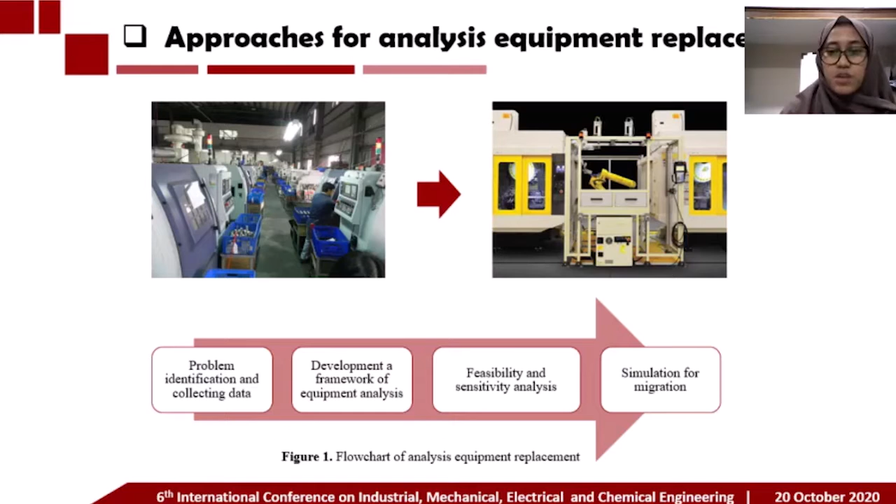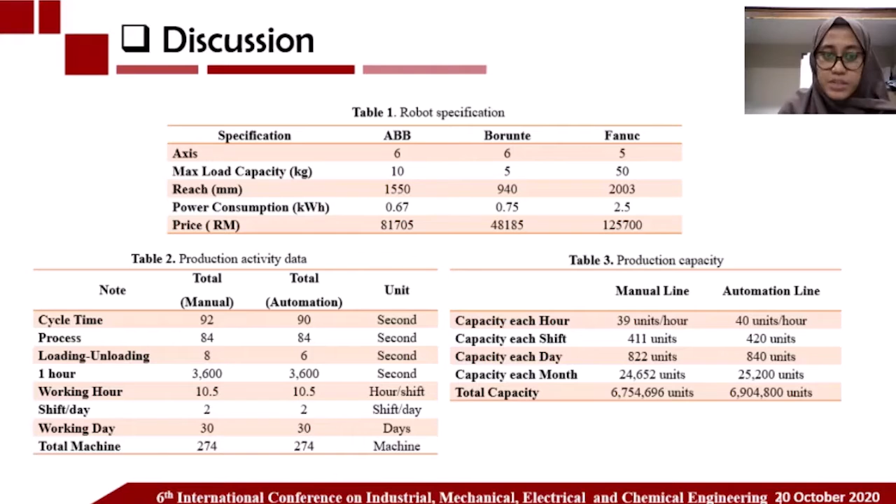This is the data used to evaluate the investment analysis, such as robot specification, production activity data, and production capacity. The first step is total cost ownership.

In this section we explain the total cost ownership of each alternative robot using the data collected. In this calculation, one robot used for palletizing activity shows that the total robot use is 68 robots, and we assume 15 years of lifetime to calculate the total cost of ownership.

Total cost ownership contains data including expected life cycle, interest rate adjusted to the actual interest rate in Malaysia, investment cost for the robots, average energy consumption each year, average maintenance cost each year, and average engineer cost each year for 15 years.

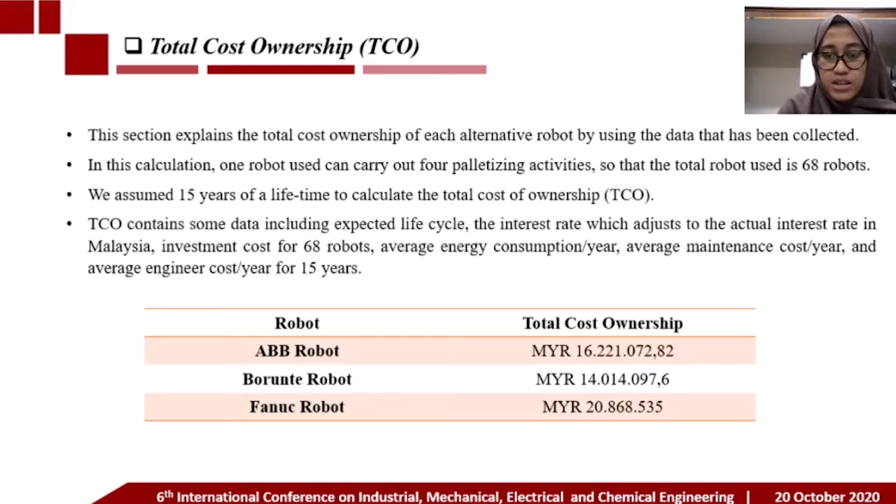This table shows the result of the calculation of the total cost of ownership.

There are five scenarios, namely income rise 25%, income rise 15%, average income, income falls 15%, and income falls 25%.

From the five scenarios and the four analysis methods, it was found that three robots are worth investing in. However, the payback period method shows that if there is a 15% decrease in income, the payback period is more than 5 years for the three robots.

At the same time, the company only allocates a 5-year payback period. Therefore, the Borunte robot is the best choice for investment because when there is a 15% decline in income, the payback period for the Borunte robot is still between 5 and 6 years.

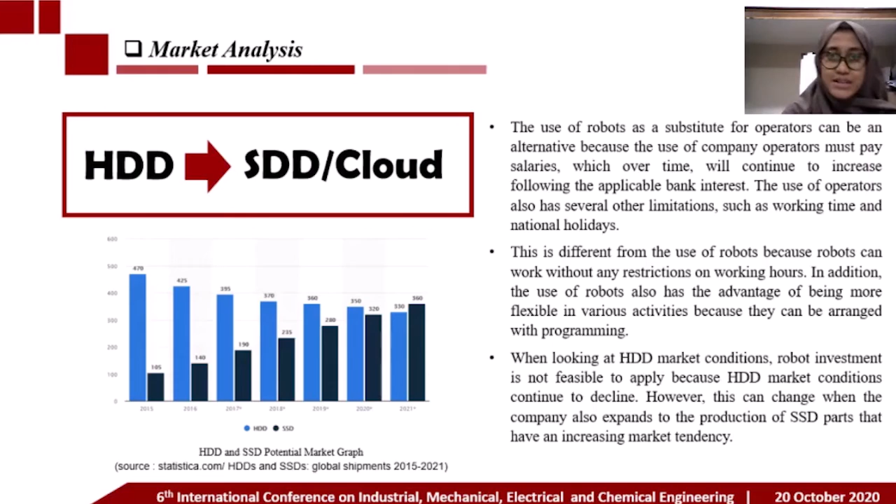For the technical analysis, there are several parameters, namely identification of tool requirement and tool specification. In palletizing activities allocated for four machines, a robot that is flexible in various movements is needed, so a robot with 6 axes is recommended compared to a robot with 5 axes.

The specification needed to carry out palletizing activity requires the ability to bring an object with a weight of around 300 grams. The company also needs coverage for the CNC machine with a range of 500 millimeters. All three robots have specifications worth investing in because they can reach more than 500 millimeters.

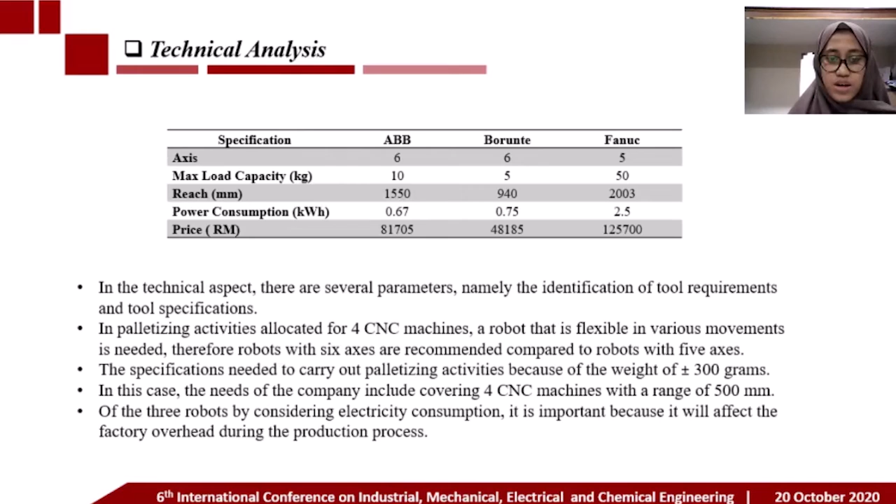Electricity consumption is also important because it will affect the factory overhead during the production process. For electricity consumption, the ABB robot is the best choice.

From the table shown, the Borunte robot is ranked first for investment, the ABB robot is ranked second, and the Fanuc robot is ranked third.

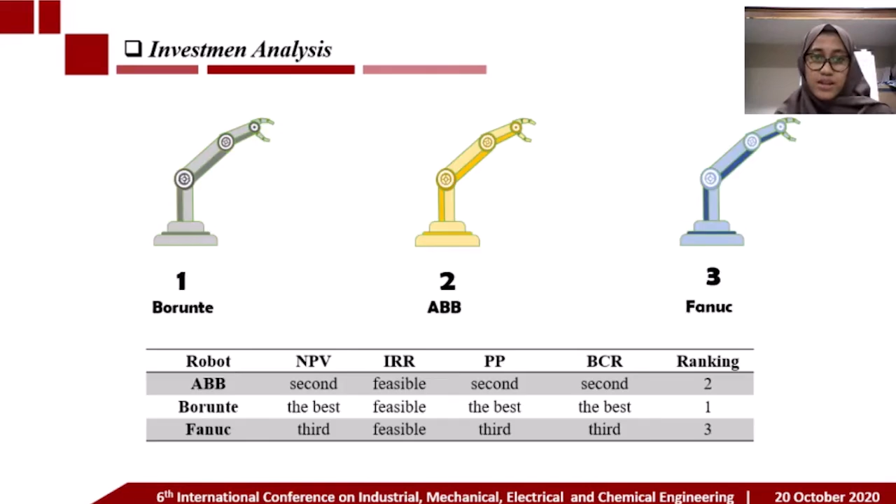Let's consider the fourth method, techno-economic analysis, and suggestions for migration strategy. There are three alternative automation migration strategies, and we consider big bang and phase introduction strategy because a parallel system needs a lot of cost.

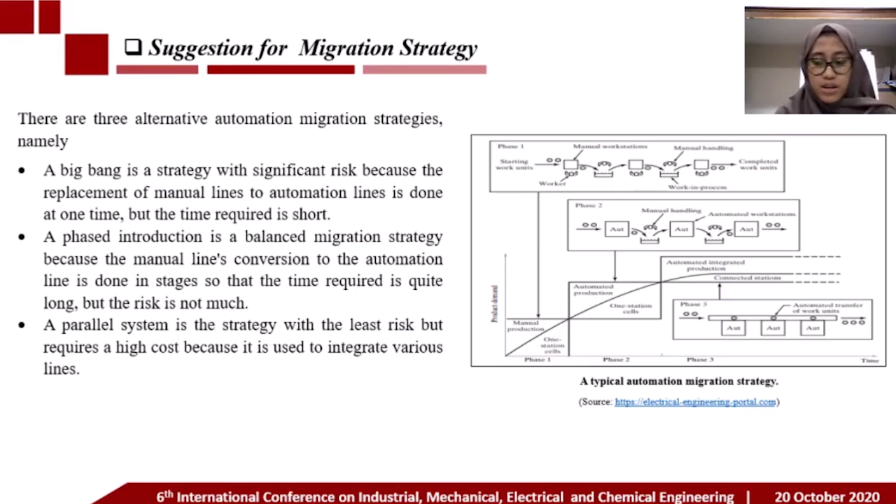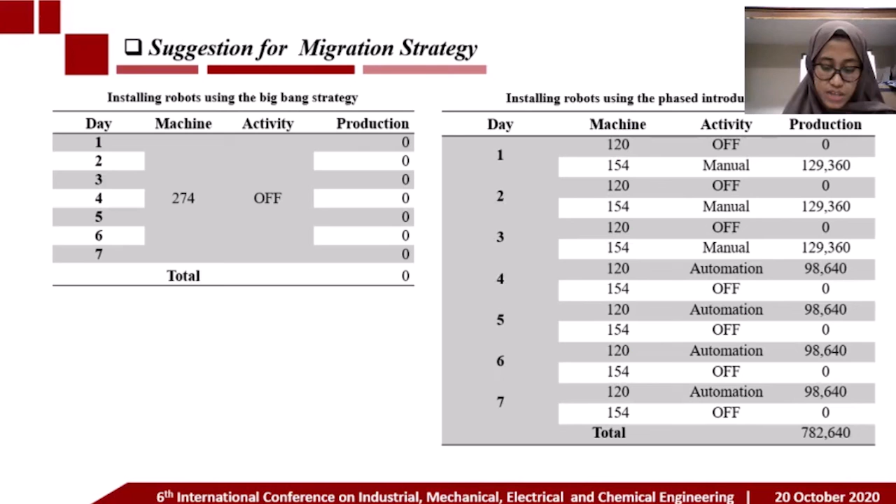From the table, we can see that the phase introduction strategy is the best choice to implement for changing the manual line to an automation line, because the use of the phase introduction method is better compared to big bang, since there are still machines running and operating during the installation process.

For the conclusion, this paper presents a case study for equipment replacement analysis for improving the productivity and competitiveness of an electronic company. According to the data, it is found that the Borunte robot is the best alternative compared with the ABB robot and Fanuc robot, as well as with the old manual production line.

For implementing the result, an automation migration strategy is needed for moving the manual line to the automation line. The use of the phase introduction method is better compared to the big bang way.

Future research is needed to consider after-tax replacement analysis to improve the calculation of the economic life of new assets and to develop a model for economical replacement time. I think that's all for me.